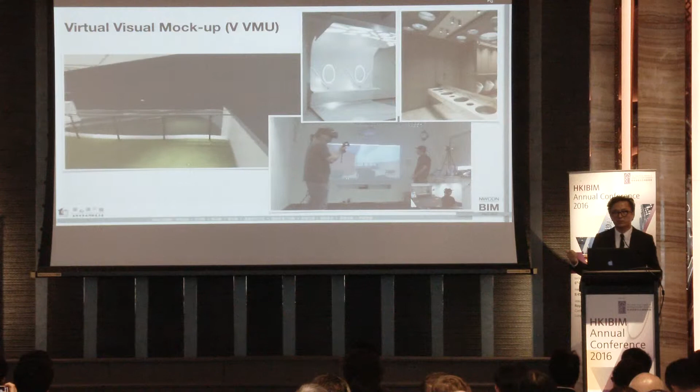VVMU means we have to format our design into a very simple, photorealistic format, in 3D and in panorama views. We let our boss see these images and this panorama before he can approve the design. If he's not happy with the design, we have to revise and refine the design to make sure the output is good enough for his approval. Then based on this result, we produce drawings for the construction.

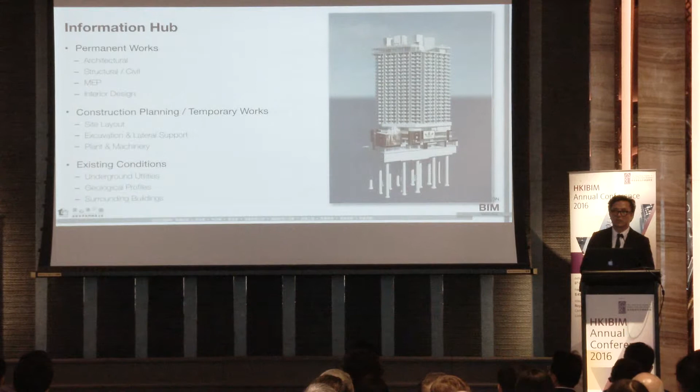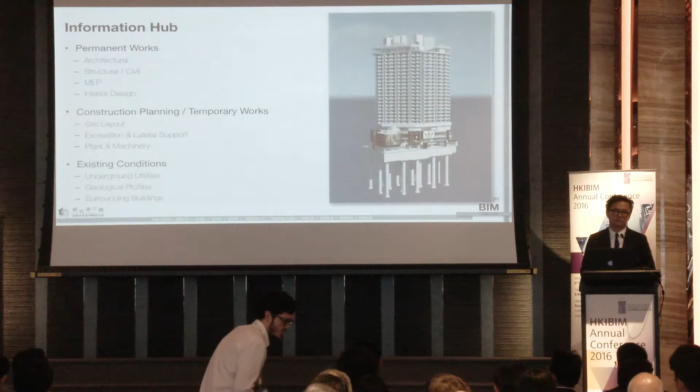Information hub, simple. We want to collect all the information, whether it's permanent works, temporary works, or even the surrounding areas. For what reason? No reason. We just want to store everything, all versions. So we have a centralized database. Then we can go for the drawing coordination.

Because we built our BIM model from the information collected, during the process we can identify a lot of problems, errors, and coordination issues. So we can raise all these as RFCs, requests for clarification, asking the professionals to clarify which information is correct. Then we can keep track of all these issues, and make sure at the end of the day all these issues are clarified and all problems are sorted before we go for construction on site.

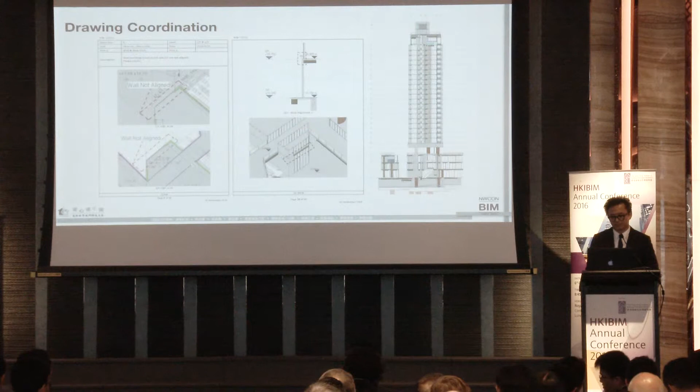Then we have CSD. The building services are always the most important part for the BIM developments. Everybody wants BIM in E&M. And after these 10 years, we all understand it's very difficult. It's not easy. We are a bit lucky. We can build our model from our design drawings, and also because we are the main contractor, we have a role to produce this CSD for the coordination.

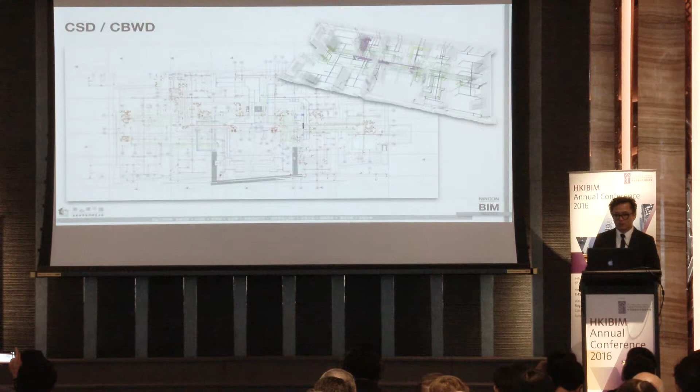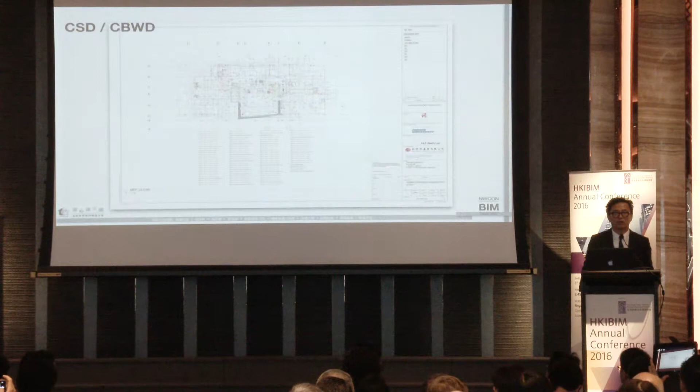And so it's an obvious solution saying we need to use BIM for our CSD production. We build the model, and the most important part is we produce all these drawings. And you can see the drawings here are a little bit different from the traditional CSD. One obvious item, of course, is color. But more important, you can see all the text, all the lines around the drawings are gone. We provide the numbering system, and we put all the text under the drawings. We said this is a new format of our CSD.

It's not in the industry, but because we are in-house, we can invent these new formats for our use. So our subcontractors, our NSC, our workers can use this kind of new format. So our drawings are more clear for their use.

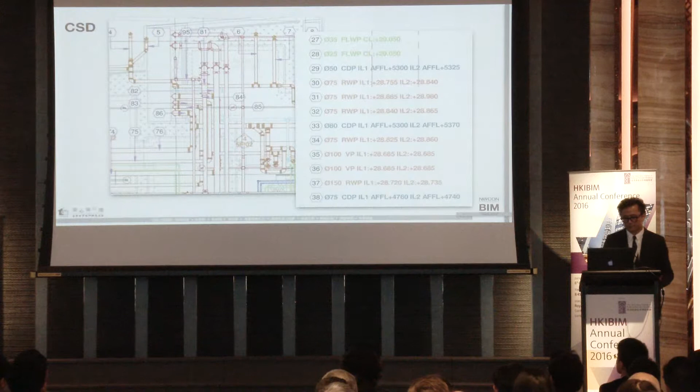And then we have the quantity takeoff. Quantity takeoff means all information except rebars. We can get it out from our BIM. And these quantities are used by our QS staff for our budget control, for our subcontracting, for everything. The most important part is the concrete. They like the concrete quantities because it's easy. Once we have the model, we have the quantities.

So in the quantities presentation, we don't have just a total number. We have all the breakdowns. So we can trace all these quantities. And also, together with the numbers, we have the drawings. We have the floor plans, we have color plans to show what is in the model. And that means whatever they put in for the parameters, we can see it from the drawings. So we make sure we have a set of drawings together with a set of quantities that is traceable. Everybody understands whether there are any mistakes in it, and if there's any mistake, we can rectify it.

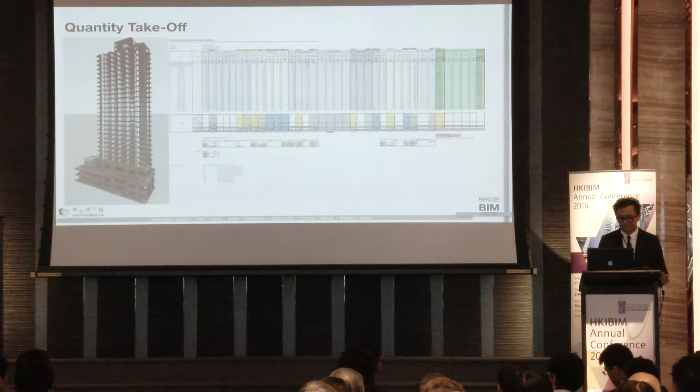And then we have this CIA. So this is my new invention. I call it Construction Information Anywhere. What it means is, before, we had a document management system to manage all our drawings and information. It's quite complicated. We have a lot of versions, we have a lot of sources, but we don't know whether all this information can come together to be correct. Now we have all this information, we process it in BIM, and then we produce our output. And then we centralize all our output in a web-based format.

All participants in our projects use the information from this platform. So they don't need to worry about the version. In the past, you always say, which version is the most updated, or which part is the most updated? No, there's only one version on our website. It's just like a web page. You don't need to care about what is in the past, but what is current. So all the current information is here. So what is in it?

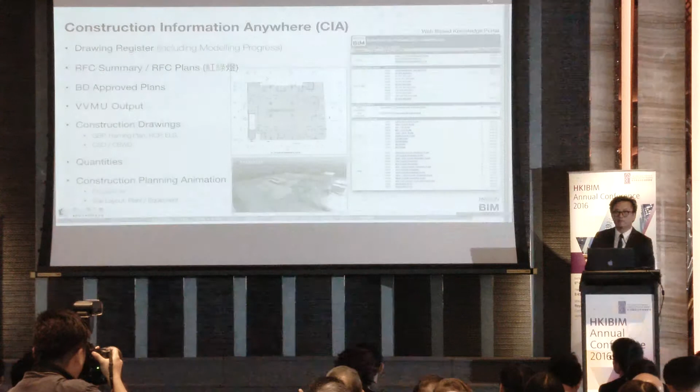We have the drawing register. The drawing register is the drawings we receive from our professionals. In the drawing register, we have modeling progress: which drawings we have modeled, and what percentage. And then we have an RFC format. In the past, we had the coordination, then we had the RFC summary. Then we can keep track of whether these RFCs are addressed or not.

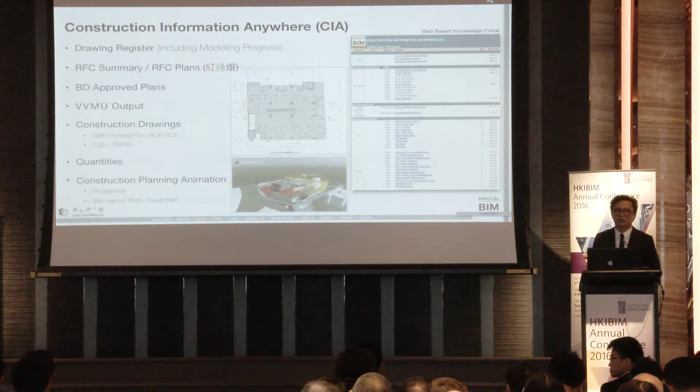Then we have the RFC plans. Later I can show you the RFC plan. It's another big invention, a very powerful invention. And then we have all the BD approval plans. In the past, on site, we needed to keep a set of approval plans so when BD staff come to inspect, they can inspect.

Now we have this platform, so they can have this information. And then we have the VVMU output, and we have the construction drawings. These construction drawings are not those produced by the professionals. It's the construction drawings output from BIM. So the construction drawing format is as good as traditional construction drawing.

And then we have the quantities, and also we have the construction planning animation. So when people ask about the program, we don't have the program here. If you want to see the program, you need to watch the animation.

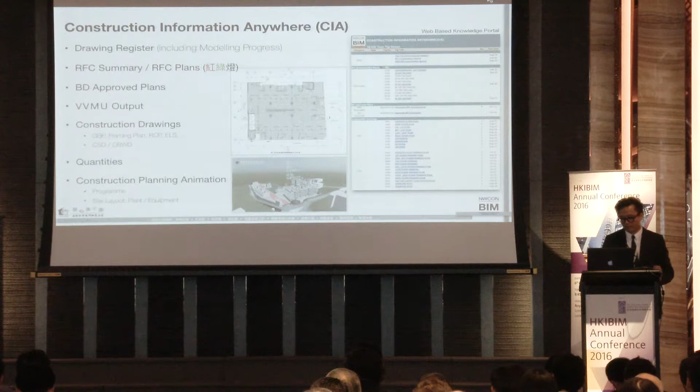So here is the RFC plan. We call it Hong Luk Dang. On the plan, we have yellow items. Yellow items are all the items for which we have raised an RFC, so that means they have problems. The red labels are those RFCs that are raised but not resolved. And then we have green items, meaning those RFCs are resolved. So we have this all the time, always updated.

And what we want is, say tomorrow we need to pour concrete on this level. We show this plan to our project managers and ask them to endorse. You know there are so many problems in the design. Are we going to pour the concrete tomorrow? If you pour the concrete tomorrow, all these problems will happen on site, and then you have to reserve some budget to rectify it.

So this is a very good tracking way to see before construction whether we still have problems. Or one day we see all the yellow gone and all the red become green, and then we know we are confident enough that our design is good enough for our construction.

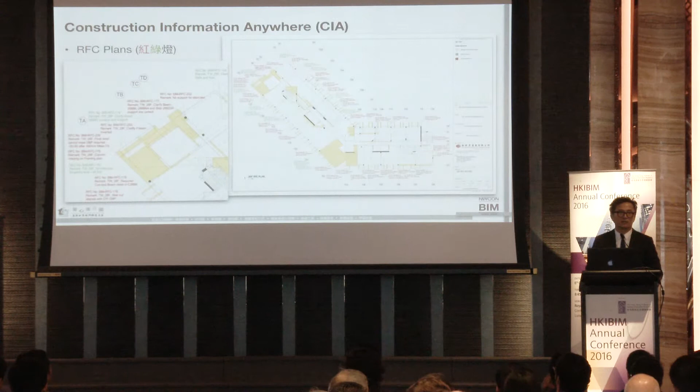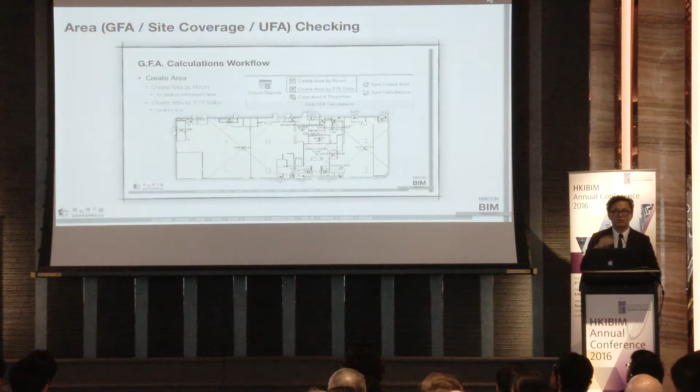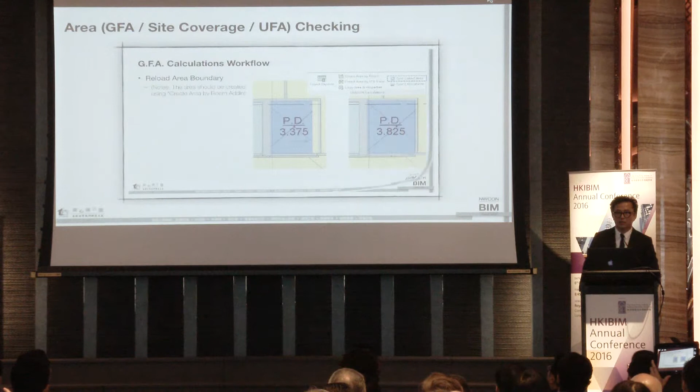And this is the last invention. It's quite recent. We have the area checking. We follow the BD approval requirement and set up everything in our BIM. We have checked 3 sets of approval drawings from 2 projects, and we found calculation errors in all these 3 sets.

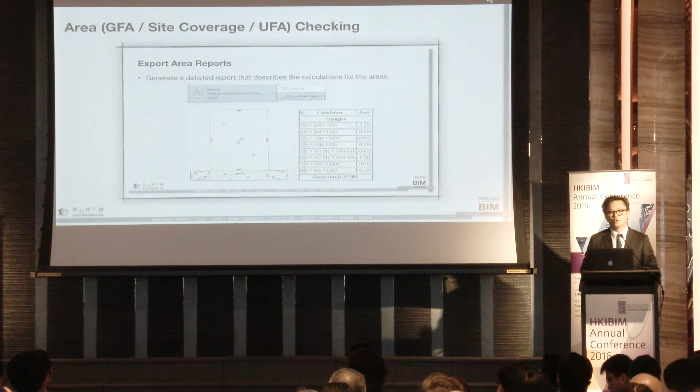So in the future, whenever we have a new set of GBP with new sets of area, we will put it into our model and check whether it is correct or not. Later, we will have a button. Just press the button, and we can see the result. This button will be shared with the Buildings Department to see whether they love it or not.

And we have our BIM standards, 3 BIM standards. One is the modeling standard, which tells you how to model to get the correct result. The second one is the workflow. We change the workflow. If you don't change the workflow, BIM doesn't work. So we have to lay down how we do it. Mainly it's about CSD. For the whole CSD process, we change the workflow. Otherwise, I can tell you, you will never reach zero clash CSD.

And then at the end, we have the standard output, so we know what we are going to produce from BIM. We have drawings, animations, BD submission drawings. All these are in the output standard. Because of these 3 standards, it becomes a very good foundation or backbone for our BIM development.

I would say the BIM journey in New World is very enjoyable because we don't need to ask why. We don't need to ask how, because we have a BIM team to produce all this information and modeling. We just need to know what and when, and then we will have the result.

And we have our BIM mission. What we see is BIM is not just a construction model. Because of the demand in building engineering efficiency and user engagement, we use BIM as a sustainability design decision-making tool. And we want to use BIM to enable our so-called bespoke facilities.